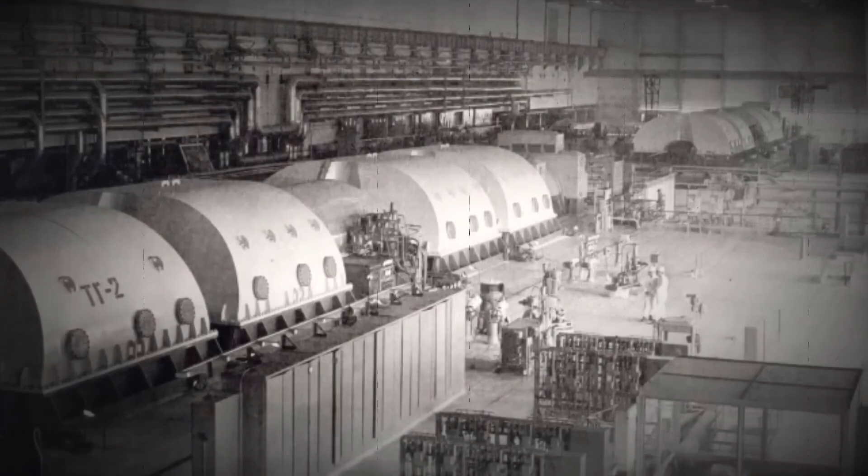The nuclear power plant had the first of its 4 reactors ready to operate in 1977, followed by number 2 in 1978. As a quick side note, Units 1 and 2 were the first generation RBMK 1000 reactors, and because of this they had slightly different core loadings and containment structures.

But the remaining 2 reactors at Chernobyl were of a slightly more modern second generation, and they were named Units 3 and 4, which went online in 1981 and 1983 respectively. There were plans for another 2 units, but these were abandoned after 1988 when risks of contamination left the project untenable.

The nameplate capacity of Chernobyl Nuclear Power Plant was Unit 1 at 1000 megawatts of electricity, Unit 2 at 1000 megawatts of electricity, Unit 3 also had 1000 megawatts of electricity, and the same with Unit 4.

In this video, I'll be focusing on the second generation RBMK, its design, and more specifically Unit 4. But I did look into the first generation in the Leningrad video.

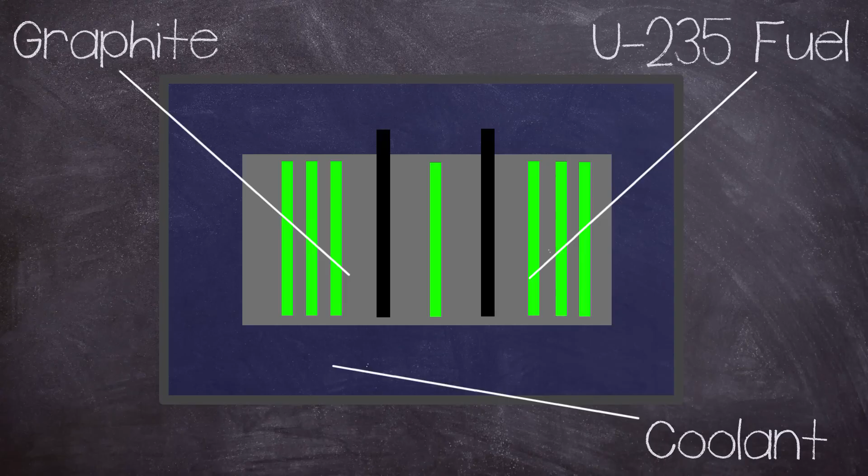The RBMK was a bit of a unique design in the reactor world, but it was a product of evolution rather than revolution, in that it used graphite to moderate the chain reaction with light water as a coolant. This combination allowed it to use lower enrichment uranium-235 for fuel, which is not surprisingly significantly cheaper than other reactor designs. The RBMK had a very large core region consisting of a height of 7 metres and a diameter of 11.8 metres, which was mounted in a steel cylinder that was placed on top of a biological shield.

The steel cylinder was 16mm thick and had a diameter of 14.52 metres by a height of 9.75 metres, dug into the floor of the reactor building, inside a reinforced concrete lined pit. Between the steel wall and the concrete lining, a water tank was placed, followed by a sand packing.

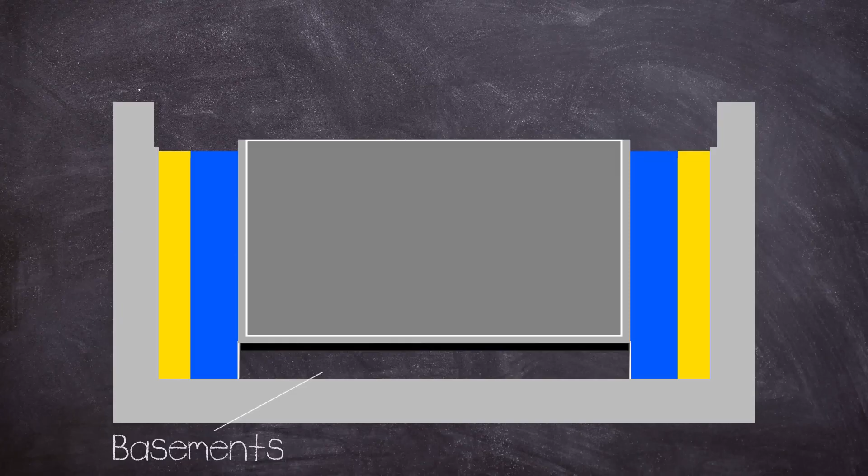Below the bottom biological shield, there were several basements used for pipework for the reactor core cooling loops. The core consisted of graphite blocks sized 25 by 25 centimetres, stacked up with holes drilled through the centre for fuel and control channels.

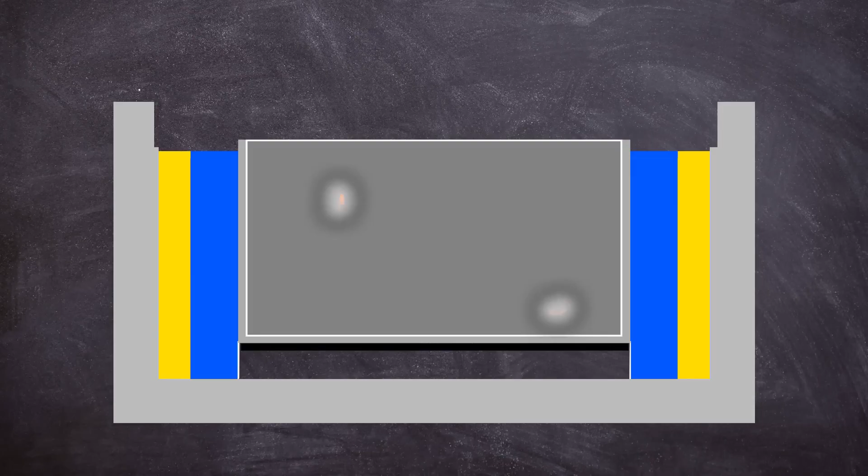The size of the core could cause issues in reactivity control during operation, but we will talk about that a bit later on. On top of the core, another biological shield was placed with a steel cover on top of it, which formed the floor of the reactor hall. The cover plate was capable of withstanding a pressure build-up resulting from steam released by two simultaneous channel ruptures.

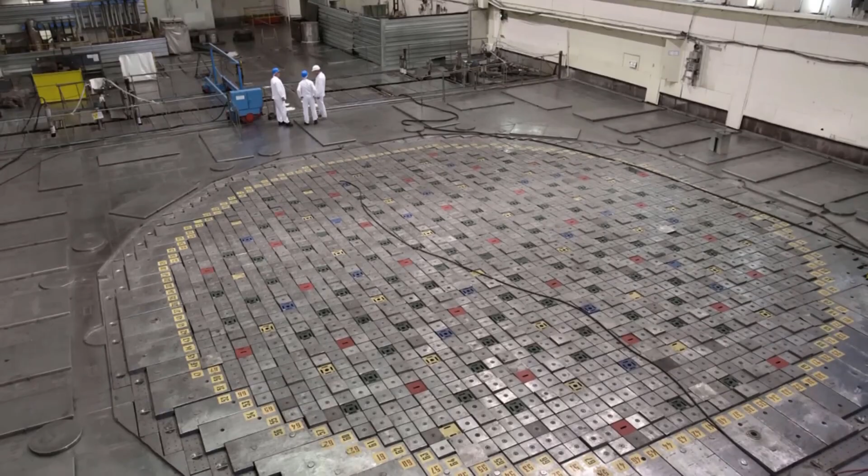All of this allowed the design to be refueled whilst in operation, which again helped with costs by reducing downtime. As a side effect of this, the confinement structure of RBMK reactors is less than ideal, as the tall refueling machine had to be housed inside the reactor hall. Because of the large floor space and subsequent roof requirements, the vast quantities of heavy concrete wouldn't have been architecturally, or more importantly, financially viable.

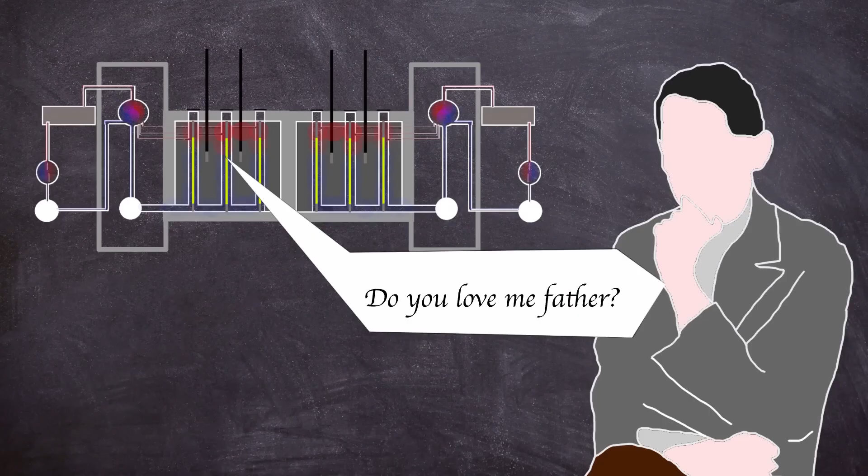The RBMK didn't have a prototype and was instead put straight into production, with the first reactor being installed in Leningrad in 1970. The original designs omitted confinement, instead claiming that the fuel being in its own channel with flowing cooling water was an acceptable alternative. The main takeaway from this is confinement was poor, resulting in disastrous results in the case of a fission product release.

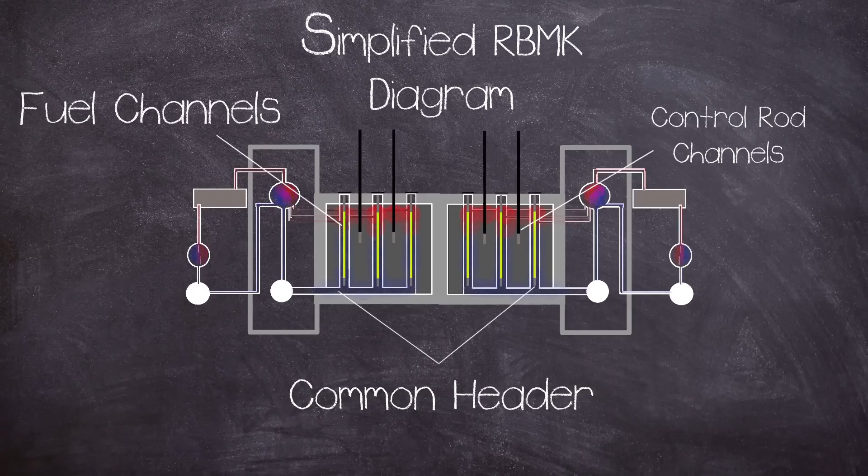The coolant was pumped through the core, from the bottom common header through high pressure tubes that jacketed the fuel elements, where the water would boil. Coolant water also circulated in the control rod channels. The primary cooling of the reactor was via two separate cooling circuits, one for each half of the core, meaning everything was doubled up, leading to four main circulating pumps, which were three operating, and one standby per loop.

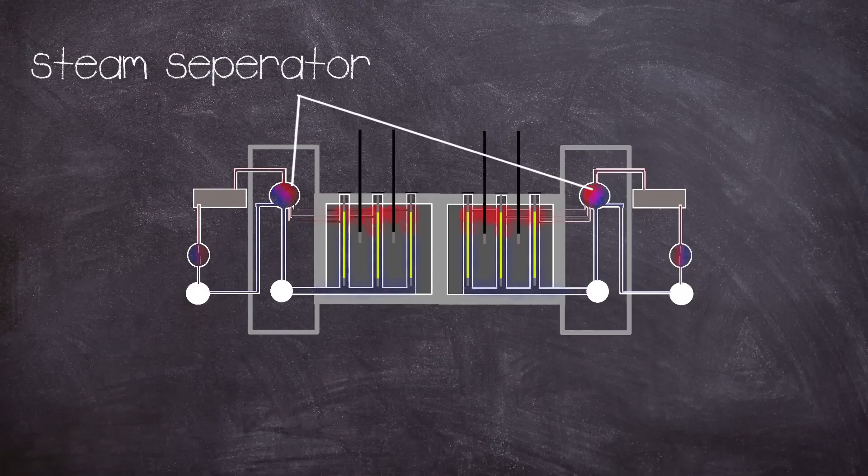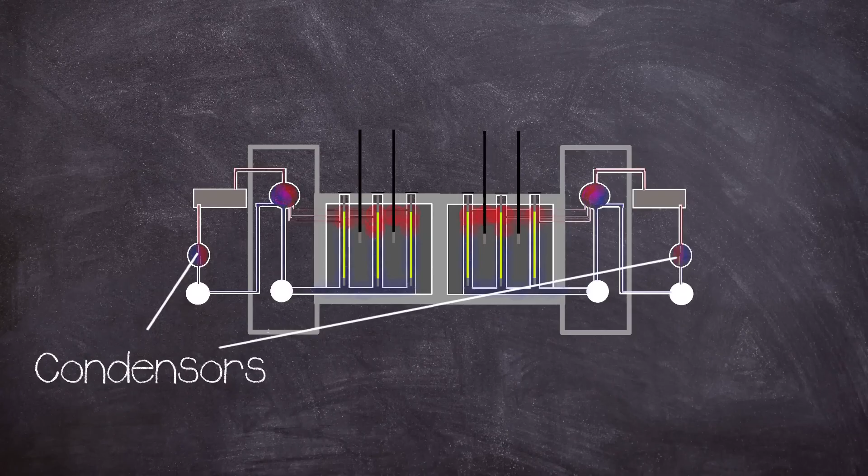As the coolant boils, it exits the top of the core and is passed through a water steam separator, which takes the steam to high then low pressure turbines which generate the electricity. The steam is then passed through a condenser that turns it back into water to be pumped back into the core, completing the primary cooling circuit. The condenser is cooled by using a separate secondary water cooling circuit, meaning the primary cooling circuit is self-contained.

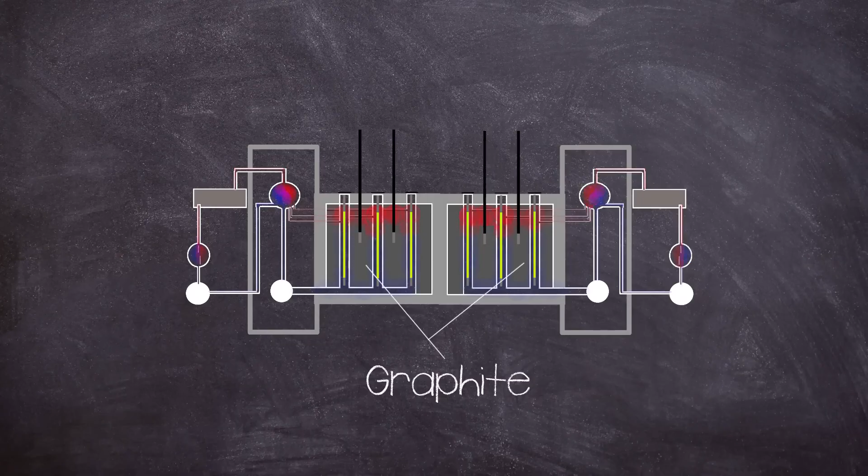As mentioned before, the reactor employed graphite blocks for its moderator. Now, a moderator is used to reduce the speed of fast neutrons released from fission, so they can better facilitate a chain reaction, getting more use out of the fuel. Ideally, moderators work without capturing any neutrons, leaving them as thermal neutrons. But where the design has its potential flaw is having a separate coolant that can also absorb neutrons, which can make the reactor unstable in certain situations.

This brings up the big elephant in the room, and that is void coefficient. You see, it wasn't just the graphite that had moderation characteristics, but the coolant water as well, because H2O naturally slows down and absorbs neutrons. This brings a problem for the reactor, as with the increase in temperature from fission, the coolant boils off into steam, known as voids, i.e. a bubble that does not absorb neutrons. With the steam not absorbing neutrons, this leads to an increase in the power of the reactor.

The RBMK did not rely solely on its coolant for moderation, because that's what the graphite was for, but the water did absorb neutrons, meaning that as it boiled off, the operators had to compensate for this with the control system. If not properly managed, an incident of a runaway can happen as the coolant heats up, increasing reactivity, heating up the coolant more, creating more steam, leading to greater reactivity, and this is called a feedback loop. During this reactor state, more and more neutrons are produced and their density grows exponentially fast, creating a positive void coefficient. The risks of a feedback loop were greater at certain power levels, but this will be covered later on.

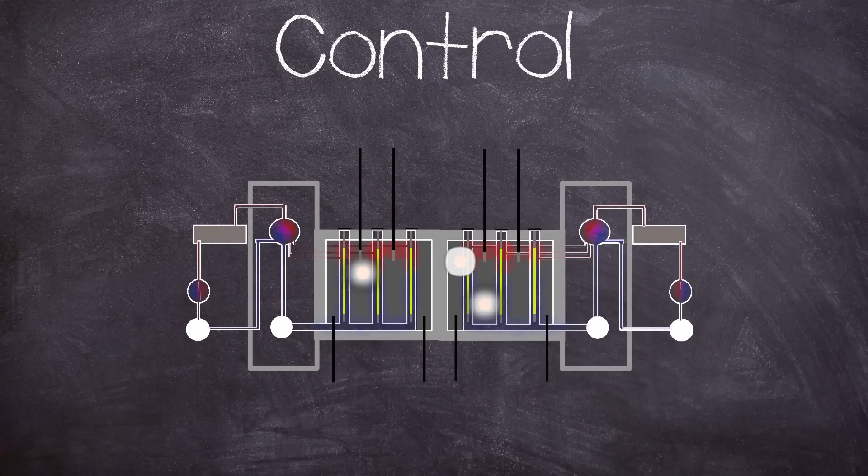Now this leads us quite neatly onto reactor control. As I said before, the core region was rather big, and this meant that the RBMK was kind of like multiple smaller reactors in that hotspots could occur which needed to be individually managed.

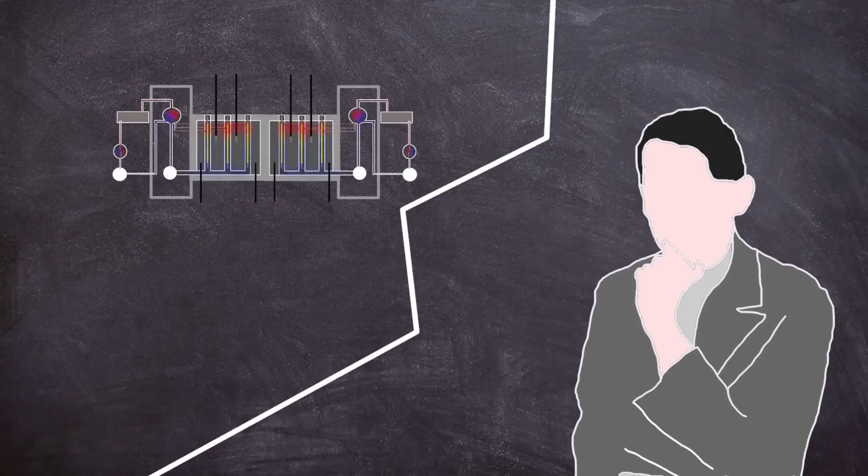And this leads on to the strange design choice for both top-loaded and bottom-loaded control rods. There were 167 top-loaded rods and 32 shortened rods loaded via the bottom, and another 12 automatic controls inserted from the top. The shortened rods were used to manage axial power distribution, which was necessary due to the core size to manage hotspots.

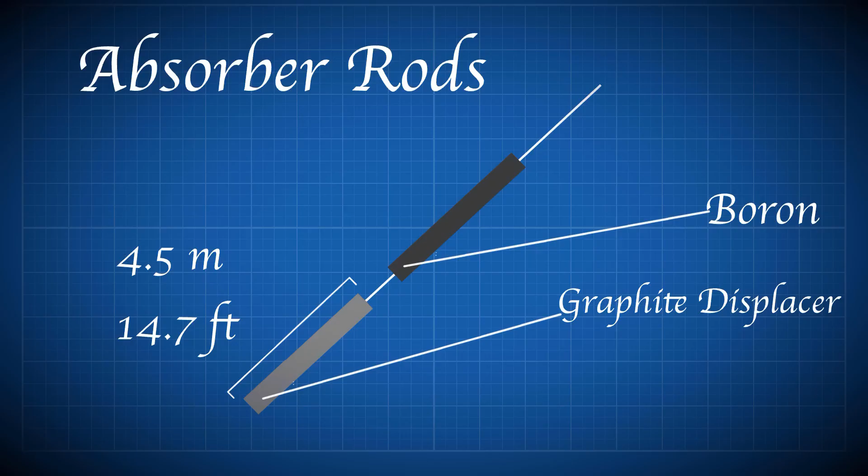The main control rods had a 4.5 metre long graphite rod termed a displacer attached to the end of the length of the control rods, except for the 12 rods that were used in automatic control.

The displacer connected to its rod via a telescope, with a water-filled space of 1.25 metres separating the displacer and absorbing rod. This was to stop water filling the space left behind by the control rod after it has left the core region, which would parasitically absorb neutrons, because removing one neutron absorber in the form of a boron control rod to be replaced by another neutron absorber, albeit weaker, in the form of H2O, kind of defeats the point of a control rod.

Thus, if there was no displacer, then more control rods would be needed, as each one would have less of an effect on the reactivity of the core. The dimensions of the rod and displacer were such that, when the control rod was fully extracted, the displacer sat centrally within the fueled region of the core, with 1.25 metres of water at either end.

But this setup in certain situations could cause a positive scram effect. On receipt of a scram signal causing a fully withdrawn rod to fall, water was displaced from the lower part of the channel as the rod moved downwards. This caused a localised insertion of positive reactivity in the lower part of the core.

This was because the RBMK had a high moderator to fuel ratio, meaning the lower part of the core would experience a spike in reactivity as the graphite displacer entered it, as it replaced the neutron absorbing water with neutron moderating graphite. But this situation was only dangerous at certain power levels of the reactor, which was meant to be mitigated by the knowledge and training of the operators, and also importantly by their management.

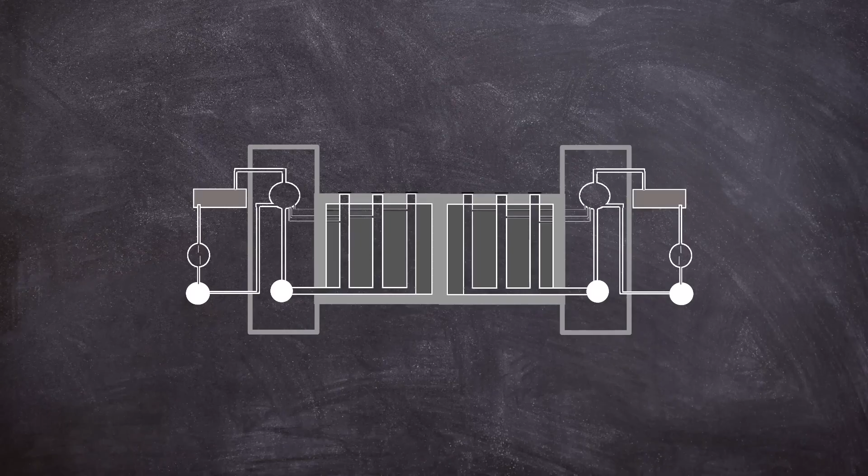The external detectors were all mounted mid-level of the core, meaning no low axial power monitoring could be undertaken. This meant that low power operation below 10% had to be done by the operators relying on experience and feel when monitoring the equipment. But manual low power control was only really intended for a cold startup, so to speak, when the reactor was free of the neutron absorbing poison Xenon-135.

I need to mention neutron poison, as it will play a vital part later on, and was also a contributory factor in another RBMK incident, the meltdown in Leningrad in 1975. During fission, some products are given off, one of which is Xenon-135, which has a high neutron absorption rate. This is okay when the reactor is in a steady state, as it burns off this undesired byproduct, as poison burning is proportional to reactor power.

But when the power of the reactor is decreased, the Xenon-135 is not burned off, and can shut down the chain reaction by absorbing too many neutrons. This is known as an iodine pit.

All is not lost, as Xenon-135 has a relatively short half-life of around 9.2 hours, so a reactor core is considered poison-free after several half-lives have passed. But this is not good from an economic standpoint, as the unit would be shut down for a few days, which is where good management is meant to come into effect, where safety is prioritised over money. But in the former USSR, taking a reactor out of action for a few days could have a detrimental effect on one's career longevity.

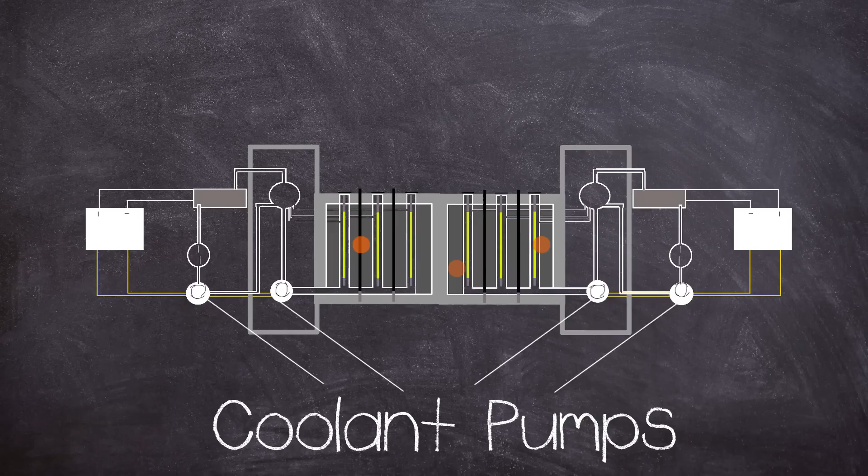And when the reaction stops, this continues, at least for a while after shutdown. During power operation this is fine as electricity is being produced, but after shutdown the pumps need to keep circulating to remove the decay heat. Usually the electricity needed for the pumps can be drawn from the national grid. But what about if there is a full power outage?

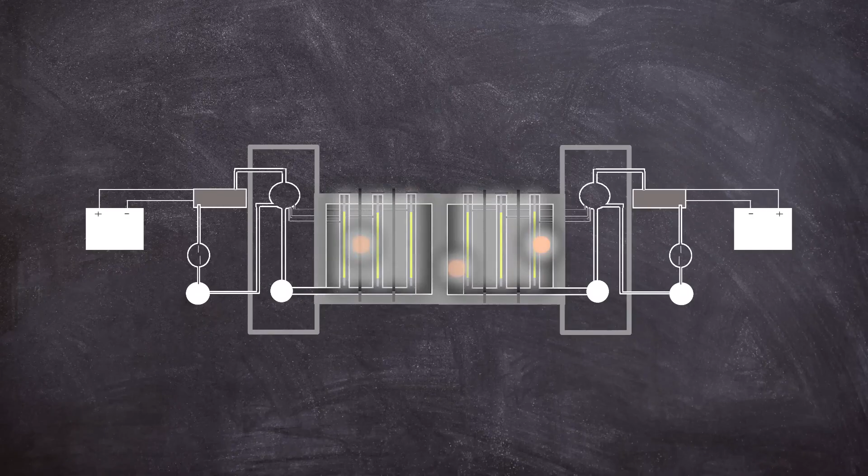Then backup is needed. This presents a problem. If for any reason, being scheduled or not, a reactor is shut down and there is a power cut, how will the pumps keep working? Well, the solution is pretty simple, and that is a diesel backup generator.

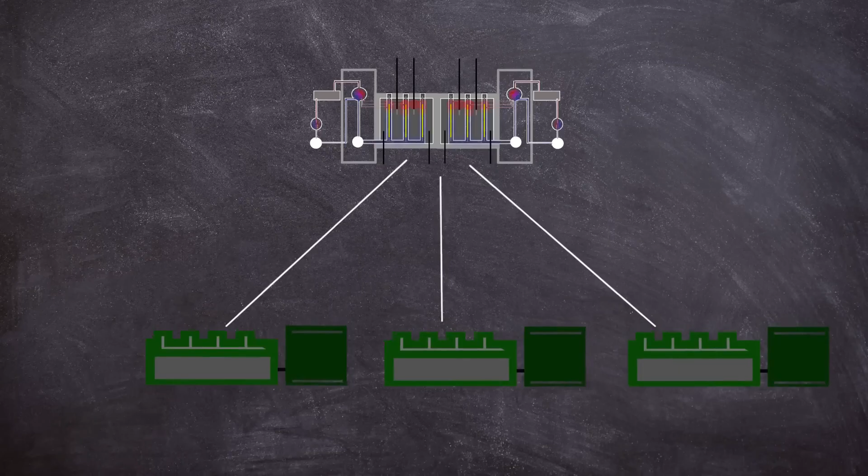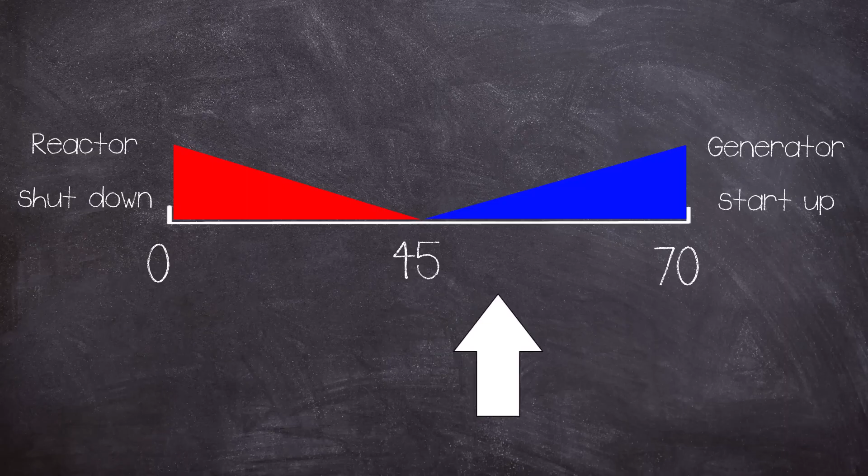Each of Chernobyl's reactors had 3 backup diesel generators, which took in excess of 70 seconds to reach full power. Too much time in the event of a full power cut. In theory, some of this time could be covered by the spool down of the turbo generators, which was theorised to cover around 45 seconds. Not the full time needed, but possibly enough to prevent fuel melting.

To prove that this could work, it had to be tested out, and in 1982, 1984 and 1985 this was attempted, but all tests failed to produce the electricity needed to run the pumps. The test was to be conducted again in April 1986. Strangely, the test procedure that was written hadn't taken into account the eccentricities of the RBMK reactor, especially at low power outputs. The test was to be conducted during a routine shutdown.

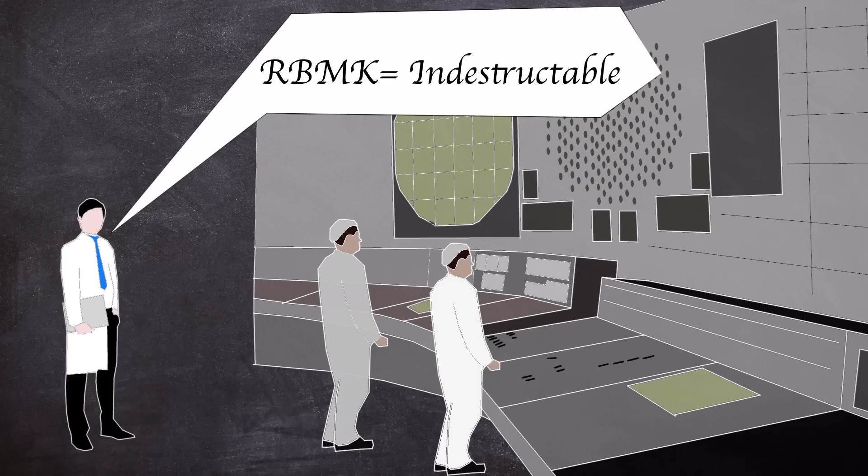For the test to go ahead, some vital systems had to be switched off, most notably the active-passive emergency cooling system used in a loss of coolant accident. This required the chief engineer to sign it off. In preparation for the test, the following had to be set up.

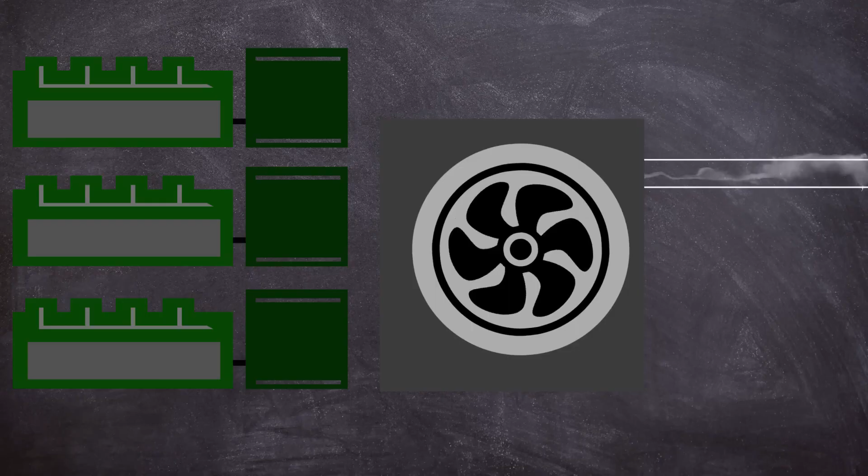The reactor power was to be reduced to between 700 and 1000 megawatts of thermal energy, and the steam turbine generator was to be at normal operating speed. After all this was sorted, the preparations for the electrical test could go ahead. The steam supply to the turbine generator would be closed off. The turbine generator performance would then be monitored to see if it could bridge the power for coolant pumps until the emergency diesel generators took over.

When the emergency generators supply electrical power, the turbine generator will be allowed to continue freewheeling down. The normal planned shutdown procedure of the reactor was then to be completed.

The date of the test was to be the 25th of April 1986, 15 minutes past 2 p.m, completed by the day shift. As such, the operators were briefed on the procedure and a team of electrical engineers was present. At around 1 a.m. on the 25th of April, the reactor was gradually powered down to around 50%, in time for the day shift.

At 1:05 p.m, the turbo generator TG7 was switched off. The 4 main circulating pumps, 2 electrical feed water pumps and other electrical equipment that was connected with this turbo generator were switched over to bus bars for the turbo generator TG8. The ECCS was disabled with the correct authorization from the chief engineer, but just after 2 p.m, the Kiev electrical controller asked for the test to be postponed to cover the evening electrical peak demand.

The request was due to another power station in the region unexpectedly going offline. Chernobyl's director agreed and the test was pushed back, but the ECCS was not reinstated. The status of the ECCS showed the lack of safety culture at the plant. Although the system wouldn't really be a factor in a disaster, it highlights the management culture at the time.

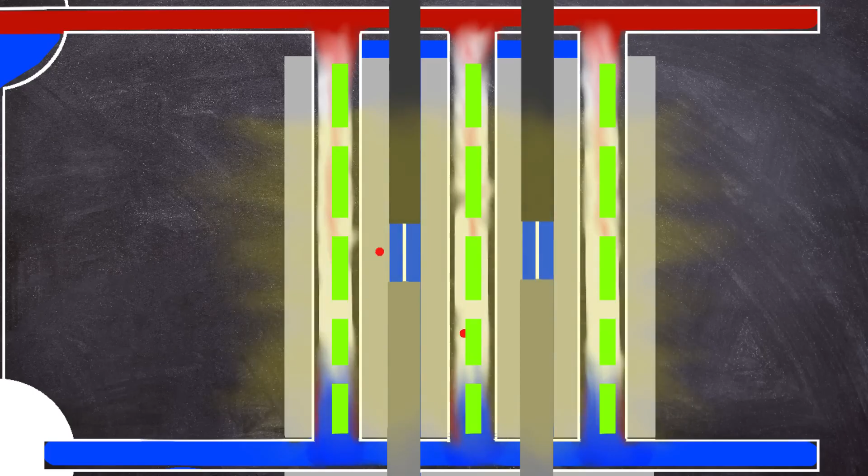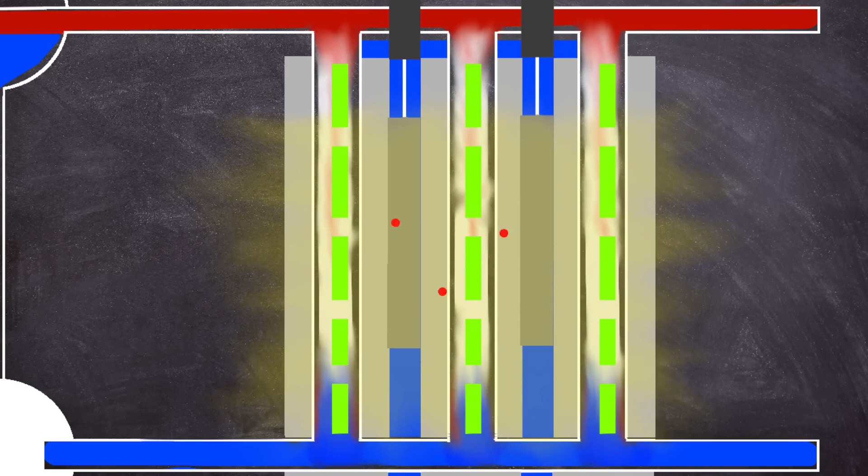This reduced the power of the reactor without any operator intervention to 500 megawatts of thermal energy, at which point manual intervention was started in order to maintain the level. At 28 minutes past 12 on the 26th of April, the reactor power had dropped to just 30 megawatts of thermal energy, with a near shutdown-like state.

It is not 100% known why, but both equipment failure and operator error have been attributed to the reactor state.

As set out in the operating instructions, the reactor should have been powered down to wait for the xenon-135 to decay, but shutting down the reactor without doing the test wouldn't have made many friends in management. To increase the power, the control rods began to be removed to try and overcome the poisoning of the core, reduced coolant void, and graphite cooldown.

In the attempts to raise the power, the operational reactivity margin was violated by removing more of the absorbing control rods, and by 1 AM around 200 megawatts of thermal energy was reached. The reactor was now in a dangerous state. Not wanting to leave empty-handed, Dyatlov insisted that the test be conducted at the current power level.

In reality, the core was heavily poisoned and was in a dangerous state with very few absorbing rods for emergency control. During the preparations of the test, the operators powered up the 2 backup coolant pumps, leading to all 8 working. The increase in water flow reduced the voids within the core, which would have set off an automatic scram, but this was bypassed by the operators.

As the coolant absorbed the neutrons in the core, only 8 control rods were left as a safety margin. The minimum that the ORM stipulated was that around 28 rods should have been in the core. The reactor started to experience a feedback loop. With not many rods in the core to manage the power, the water in the reactor found itself being the main neutron absorber, and disaster was just waiting to happen.

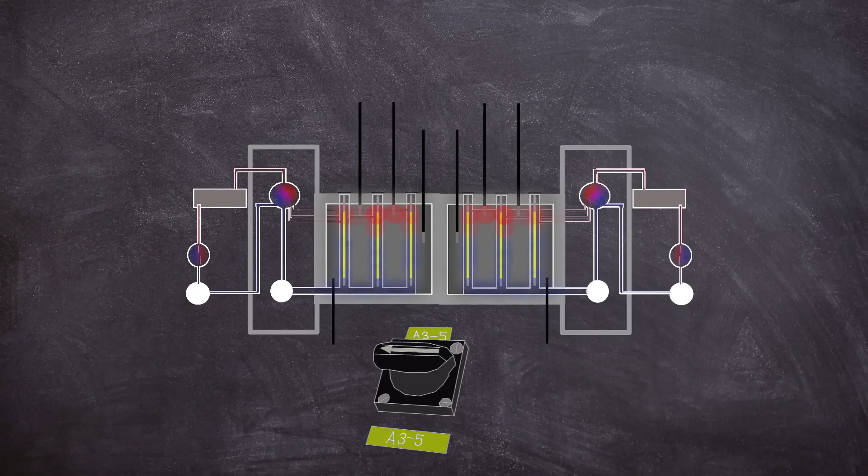At 1:23 in the morning, the actual test had now begun. The command given to the stop valves for turbine number 8 closed and the rundown operation started. As the turbines spooled down, the power to the feed water pumps slowed, increasing the temperature of the coolant, creating more voids. With less water absorbing neutrons, the power of the reactor began to rise.

A feedback loop was beginning to start in the lower part of the reactor core. The operators pressed the AZ5 button in response to the worrying increase in power, and the control rods started their travel into the reactor core.

As the control rod attached graphite displacers moved down to the lower part of the core in their control channels, the neutron absorbing water was pushed out of the way, creating a momentary spike in power, replacing it with neutron moderating graphite. During the spike, some of the fuel rods ruptured, blocking the control rod columns, stopping the control rods at 1/3 insertion. This left the graphite water displacers stuck in the lower part of the core, increasing the runaway power excursion.

Within 3 seconds, the reactor power rose to 530 megawatts of thermal energy. In the control room, a few shocks were felt, and the control rod indicators showed that the insertion had stopped.

As the channel pipes began to rupture, mass steam generation occurred as a result of depressurization of the reactor cooling circuit. Fission materials leaked into the coolant, and steam pressure grew inside the core as the coolant boiled off, creating a greater neutron population. The reactor power hit 30,000 megawatts of thermal energy, although it is thought that the power could have gone much higher than that during the excursion.

The steam blew off the top steel cover and top biological shield of the reactor as more than the 2 designed fuel channels failed, releasing debris into the reactor building. This was what would later be described as the first explosion, but it would not be the last.

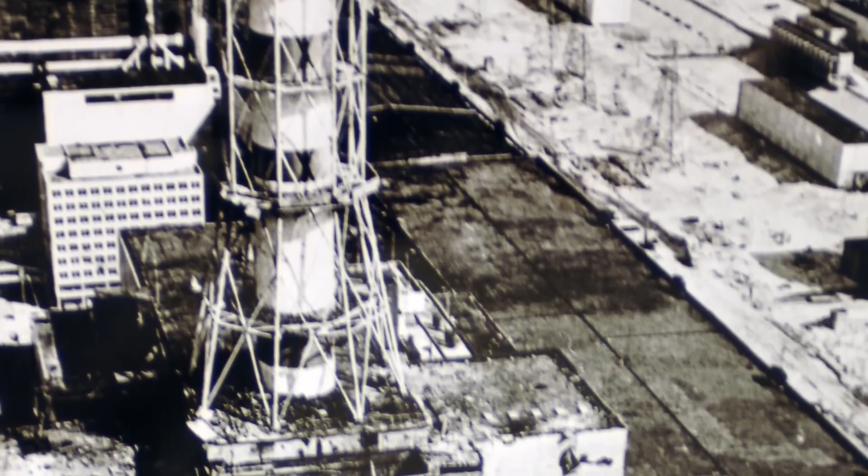Some of the debris that was ejected started a fire on the roof of Reactor 3's building, but insanely the unit wasn't shut down straight away. Instead, the operators were told to take iodine tablets and don respirators.

At 1:45 in the morning, the first responders from the Chernobyl fire team arrived under the command of Lieutenant Volodymyr Pravik and began trying to extinguish the flames on Unit 3's roof. All around them lay pieces of Unit 4's graphite core.

The firefighters were only aware of the fire, and because of this they didn't have any radiological protective clothing on. As they worked, they breathed in some of the fission material in the form of dust and were exposed to the deadly radiation.

Many would come down with acute radiation sickness shortly after. Some of the first responders felt a metallic taste in their mouths, similar to what others had reported post-exposure, for example from the victim of the Wood River Junction criticality.

The fires on the roofs of Units 3 and 4 were under control between 2:10 and 2:20 in the morning, and the fire was fully put out at 5 o'clock in the morning. However, the graphite fire in what was once Unit 4 continued to burn, expelling its radioactive plume of dust, steam and smoke into the atmosphere.

The operators started to pump water into the core, but this did little to bring the situation under control. The estimated dose of 5.6 Röntgens per second was experienced around some parts of the reactor building, which is equivalent to more than 20,000 Röntgens per hour, enough to give you a lethal dose in minutes.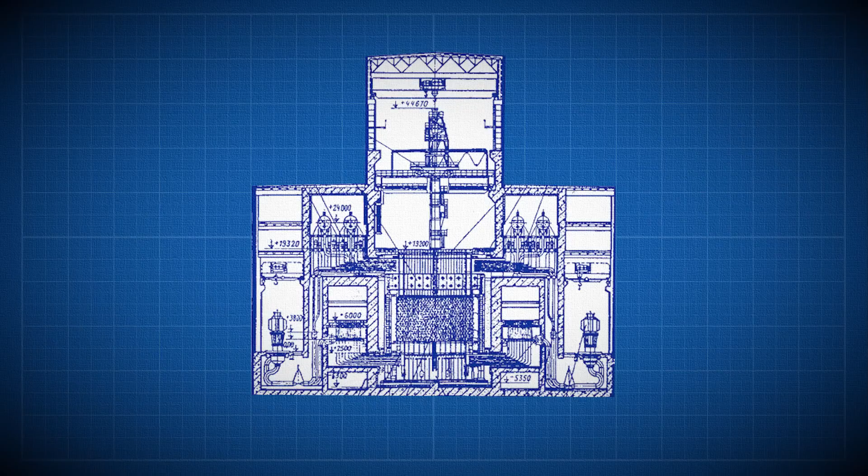A government commission was created. The firefighting efforts and pumping of coolant water left the basement flooded, which caused another potential disastrous outcome: another steam explosion. The fuel from the core was melting towards the basement, which had flooded.

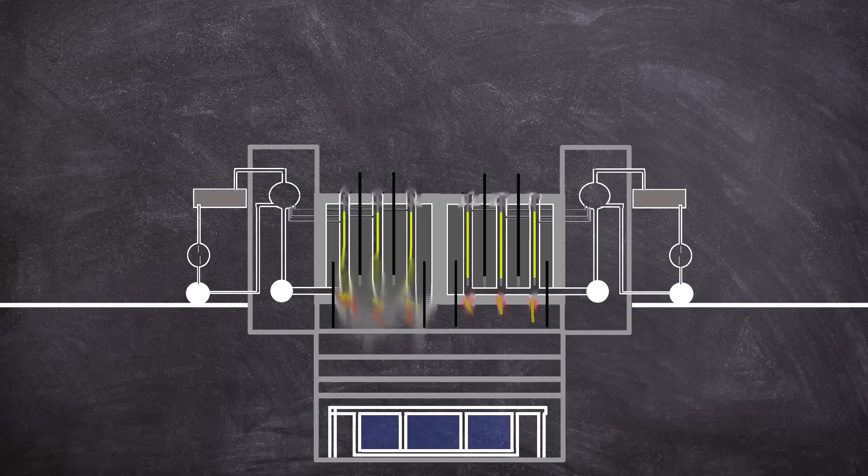But below that was more water from the bubbler pools, a large water reservoir for the emergency cooling pumps and a pressure suppression system. Needless to say, this was the next point of focus for the accident management team.

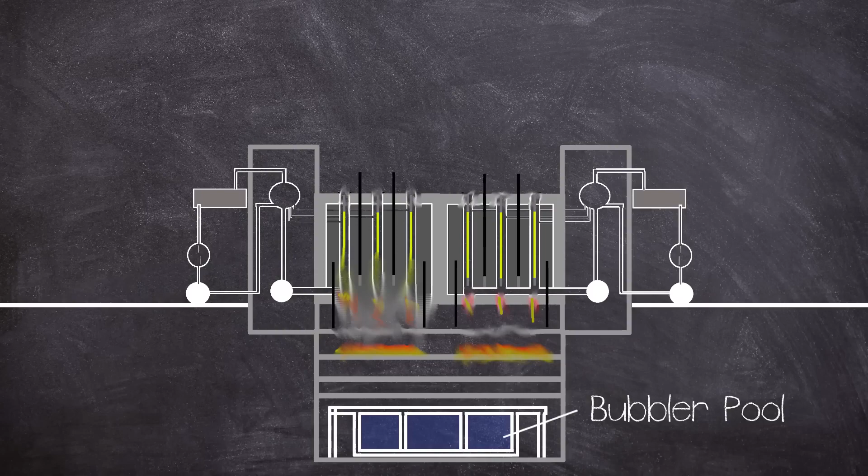Engineers Alexei Ananenko and Valery Bespalov, and supervisor Boris Baranov, volunteered to empty the bubbler pools. This was done by valves controlling sluice gates, which were housed in a room that had now become flooded. All three men donned protective suits and breathing equipment and made their way down the corridor.

The men were successful and the bubbler pools began to empty. Surprisingly, all three survived not only the day but continued to live long after the disaster, averting the immediate steam explosion. But that wasn't the end of the worry of a deadly explosion.

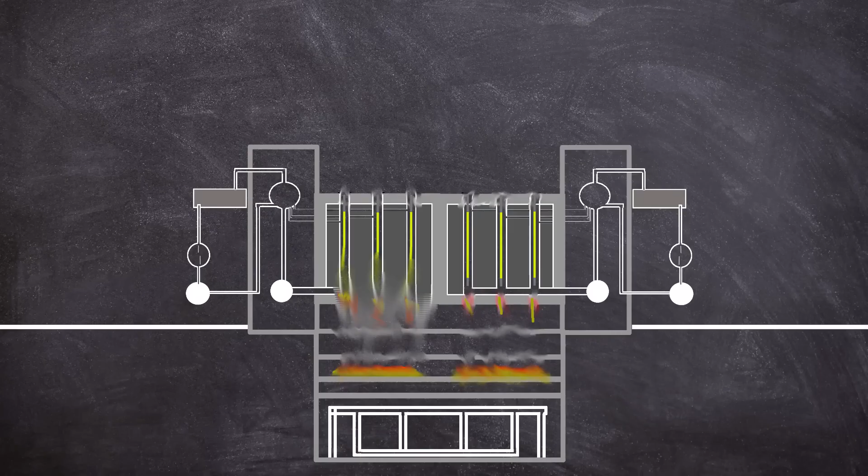As described in the film China Syndrome, the core could continue to melt through the floor of the containment and into the earth, eventually hitting the water table, meaning another steam explosion.

The next focus of the accident management team was stopping the molten core from escaping the bottom of the reactor basement. A design thought up by physicist Leonid Bolshov involved digging out a cavity below the reactor building basement.

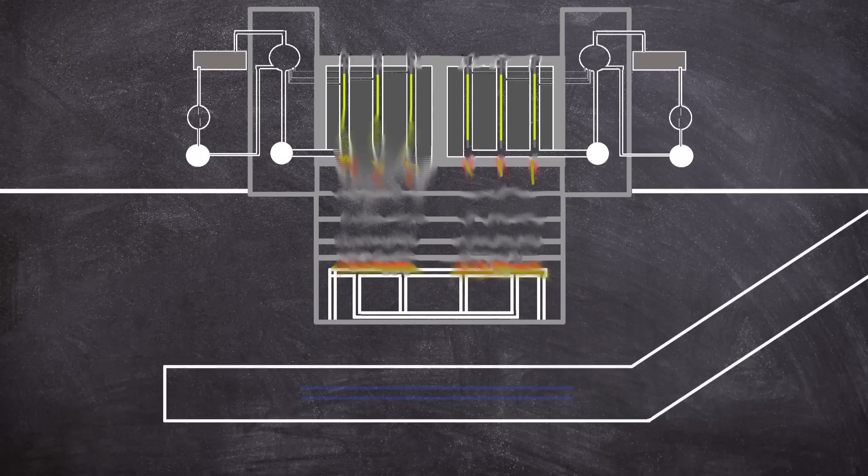The concept used a coiled formation of pipes cooled with water and covered on top with a thermally conductive graphite layer. The graphite cooling plate was to be encapsulated between two sacrificial concrete layers, each one metre thick. In theory, as the molten uranium oxide hit the graphite, it was to rapidly cool down, catching the core meltdown.

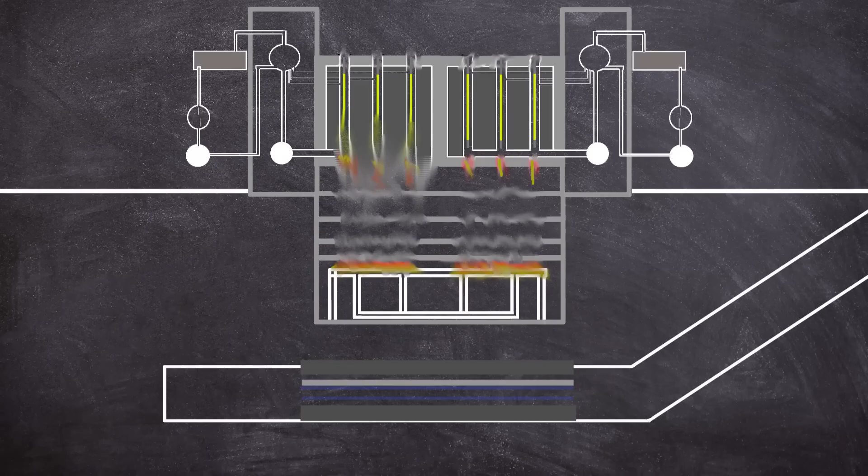Thankfully, the theory didn't have to be put into practice, as the core had finally come to rest in one of the lower basements of the reactor building, part of which formed the famous Elephant's Foot, discovered in December 1986, which had a radioactivity of 8,000 roentgens, or 80 grays per hour.

For reference, a whole body dose of around 5 grays can be lethal. The molten material is known as corium, a mixture of the material found inside the core, mainly made up of silicon dioxide with traces of uranium, graphite, zirconium and titanium.

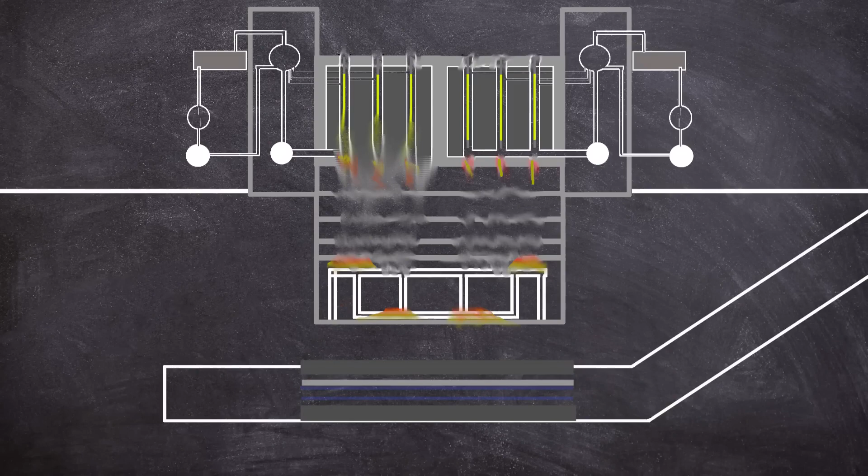The excavated cavity and cooling system, now unneeded, was filled with concrete to help the structural integrity of the heavily damaged reactor building.

A plan was conceived to contain the contamination release of Unit 4 in the form of a concrete lid, which would come to be known as the sarcophagus.

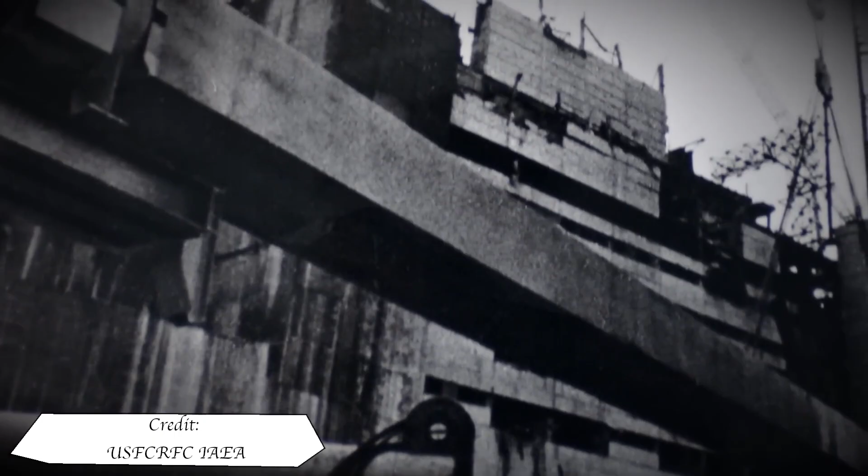Construction began in May 1986, 24 days after the disaster, to encapsulate some 200 tonnes of radioactive corium, 30 tonnes of highly contaminated dust, and 16 tonnes of uranium and plutonium. The construction would last for 206 days, between June and late November of the same year.

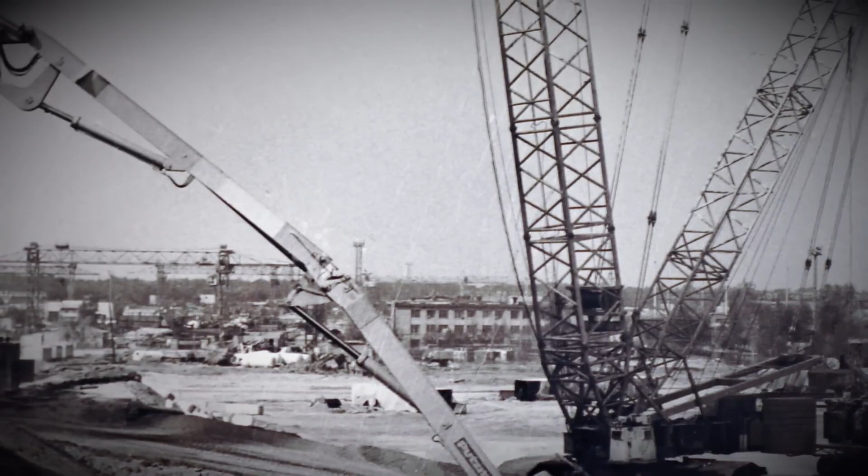But before the core could be enclosed under the sarcophagus, the next phase of remediation was to remove all the core material scattered across the area, and one of the most dangerous places was the roofs of the buildings surrounding Unit 4. Initially, robots were thought to be able to undertake the clearing works, but due to radiation interference, only around 10% of the debris could be recovered.

This necessitated the use of good old-fashioned people. The most basic of equipment was needed for the task, which included protective clothing and a shovel. A total of 5,000 people, known as liquidators, were called upon to undertake the cleanup on the roof, each only being allowed between 45 to 90 seconds of total working time.

This reduced the risk of exposure. The calculated risk was 25 rem, or 250 millisieverts, of radiation per person. There were many more liquidators also used for other clearing up works in the wider area.

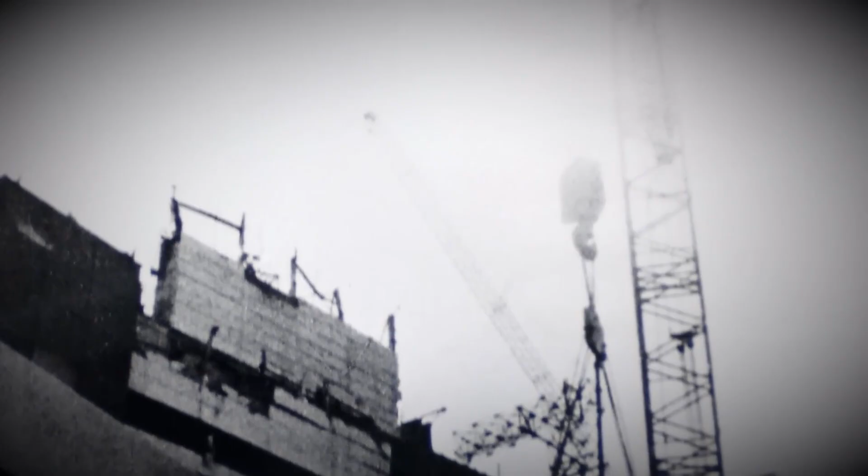And finally, after this, the sarcophagus could be closed over the turbine hall and reactor building. The construction was undertaken over 8 stages, all whilst Unit 4 released contamination, and next to Unit 3, which still needed to be operable. Concrete containment walls were built around Unit 4 and a dividing wall was erected between it and Unit 3.

The sarcophagus was placed on top of the concrete containment walls. More than 400,000 cubic metres of concrete and 7,300 tonnes of metal were used during the construction of the sarcophagus.

The building encapsulated an estimated 740,000 cubic metres of heavily contaminated debris together with contaminated soil. Holes were installed in the structure to allow pressure release, albeit through a filtration system.

The shelf life of the structure was only thought to be around 20 to 30 years, necessitating a new containment structure, but this will probably be covered in the next video in this series.

So, with an official death toll of 31, a nuclear power plant essentially unusable, and many decades ahead of remediation works, how was Unit 4 allowed to be operated in such a dangerous state? Unsurprisingly, it comes down to management.

The warning signs of the potential for fuel damage in an RBMK-1000 reactor reared their heads several times through the reactor type's history. A partial fuel melting in Leningrad over 10 years before, in 1975, had been covered up, and information was not passed on to other RBMK operational staff at different power plants.

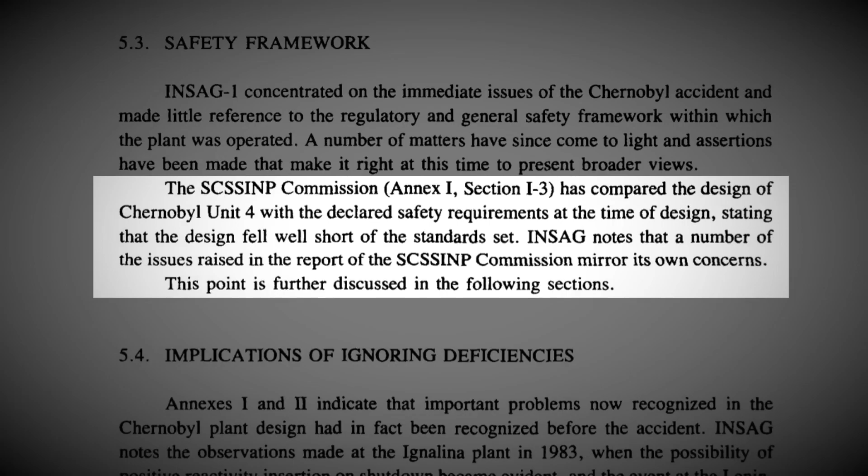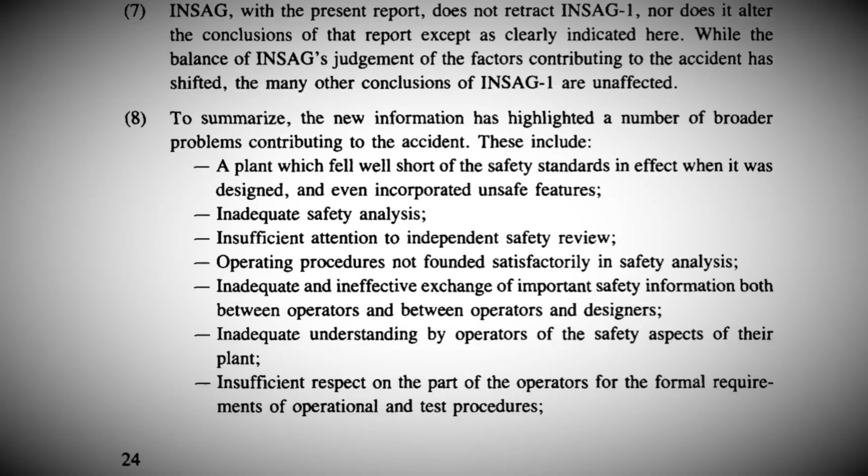This was all highlighted in the 1992 INSAG-7 report, which also said in its summary: the plant fell well short of the safety standards in effect when it was designed, and even incorporated unsafe features, compounded by inadequate and ineffective exchange of information between operators, and between operators and designers. There was an inadequate understanding by operators of the safety aspects of their plant, also affected by insufficient respect on the part of the operators for the formal requirements of operational and test procedures.

The industry in the USSR had an insufficiently effective regulatory regime in place to counter pressures for production. The pressures from central government and lack of awareness of the design risks of the reactor meant that management acted dangerously in the false pretense that the RBMK was indestructible. Pretty much the entire management structure was throwing around a grenade that they didn't know had the pin pulled out of, meaning disaster was only a matter of time.

Now I'll be following up this video with another video at some point about the wider impact of the disaster on the local and wider population, as well as digging deeper into the liquidators and their heroic work. Thanks for watching, I hope you enjoyed the video.